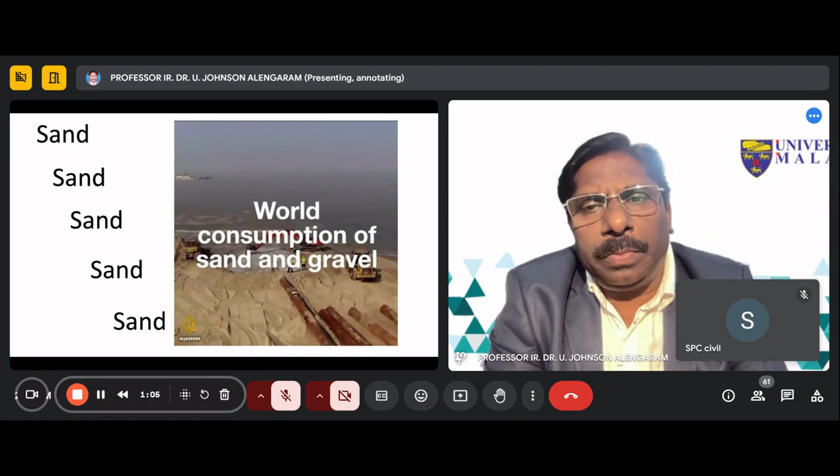Find sand in the world. It's almost become like air, the air we breathe. We don't think too much about it, but you can't live without it. Sand is not a sustainable resource. No other resource is used in such vast quantities as sand, maybe with the exception of water.

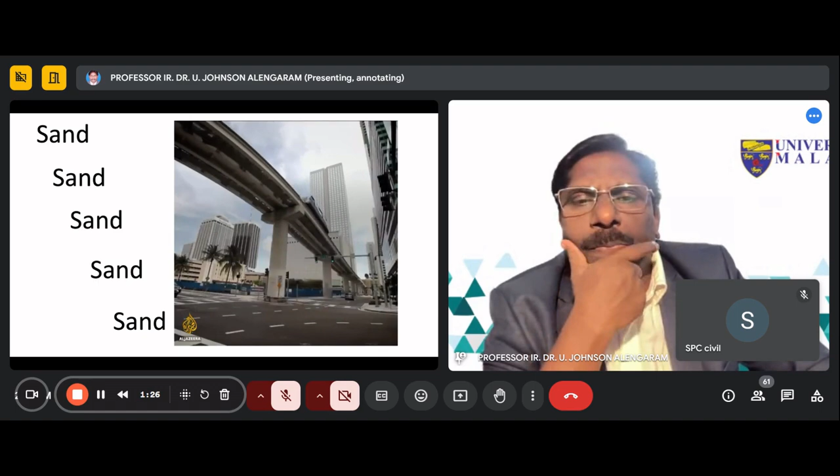The value of sand is such that it's a commercial commodity that is smuggled. I mean, it's a big business smuggling sand.

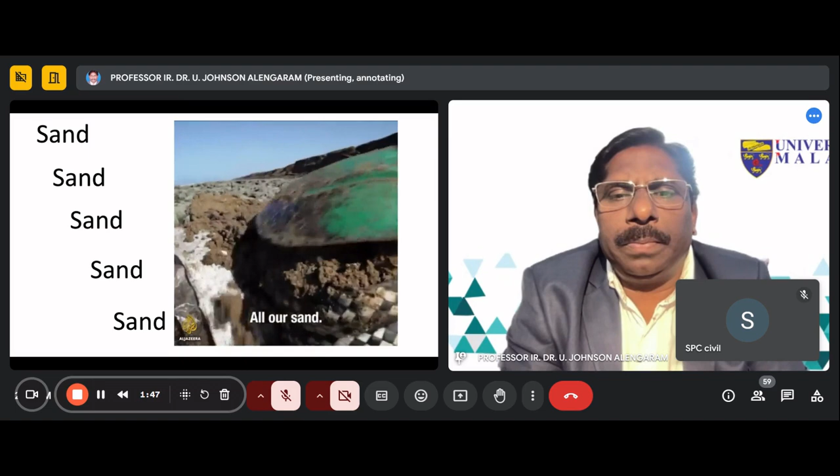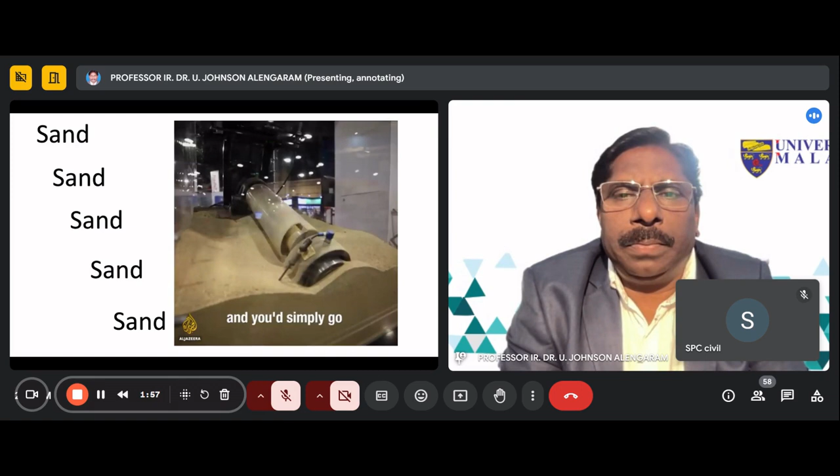It used to be that you'd have a sand and gravel deposit, and you'd simply go and dig it up out of the ground, so you'd have sand to make your roads, bridges, and buildings out of. But that type of material has all been taken away. It's gone, we've used it already.

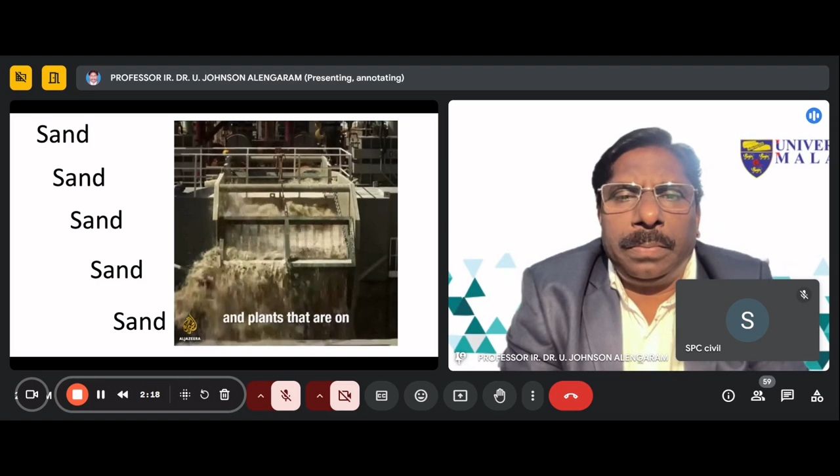As you dredge up the sand, of course the animals and plants that are on the seafloor will all be dredged up as well. Whatever living communities are there will just be eliminated.

Globally, between 75 and 90% of beaches are actually undergoing some sort of retreat, and that's only going to get worse.

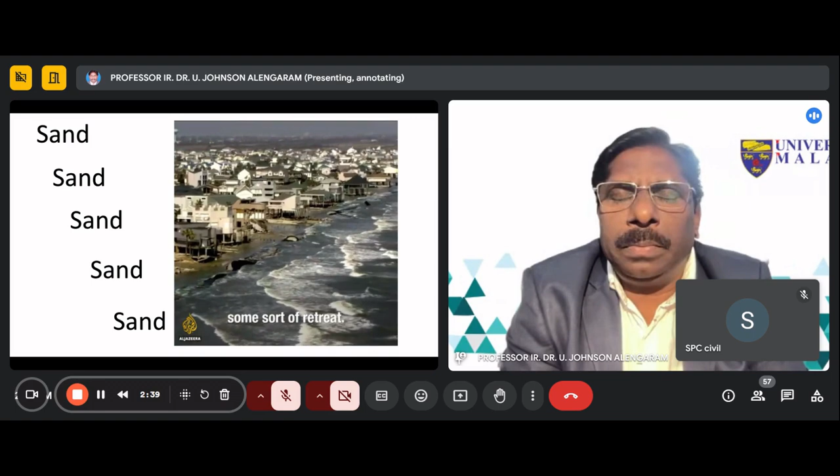This is very serious information regarding sand. I'm really concerned, as a researcher and as a parent, we should think of the next generation, and it is very serious. I hope what you see here shows that sand is not only used for cement construction in industry, but in a huge number of applications: electronics, cosmetics, even paper and tissue papers, and so many other things. Sand is a precious material, so it's not available nowadays. It's very sad.

Though some of us may end up in government agencies for policy making, we need to think of how we can utilize some of these materials. For instance, in Malaysia, even Indonesia is the number one palm oil producing country. Thailand, Colombia, Nigeria, Ecuador, Guatemala, and Papua New Guinea - all these countries are producing palm oil or palm trees.

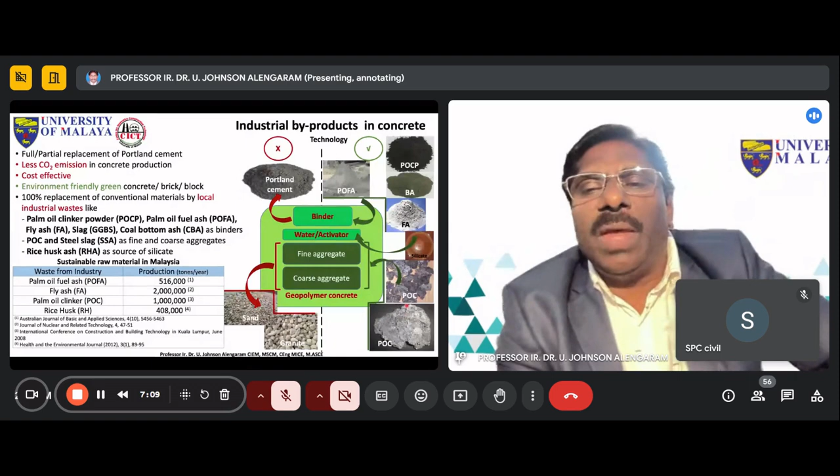We can also eliminate conventional sand by using other wastes found in Malaysia. These materials should be sustainable and at the same time resilient. Looking into GGBS, palm oil fuel ash, palm oil clinker powder, rice husk ash, coal bottom ash, and fly ash—these are some of the materials available. Some are traditional, and some have become traditional, but others are non-traditional.

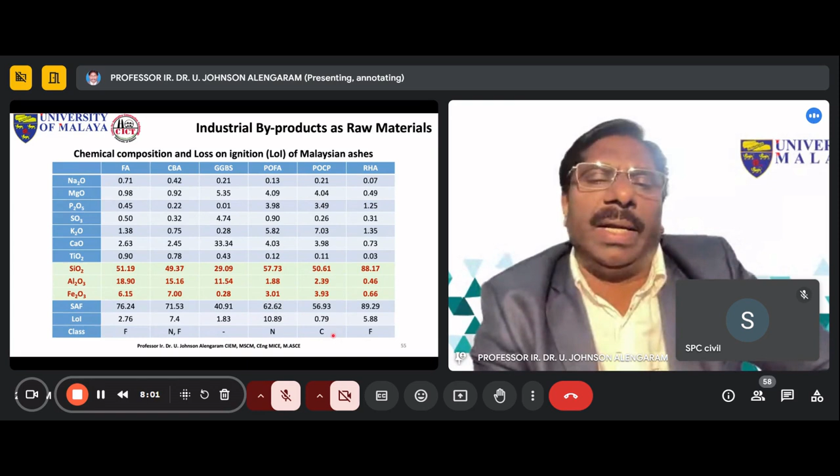There's palm oil fuel ash, palm oil clinker powder, and rice husk ash. If you look into the silica, alumina, and iron content, I'm sure this one is about 76%, falling under class F material or pozzolanic. This one is class C material. So these are the pozzolanic materials—some fall under class C, class N, or F. Based on the calcium content and silica content, they can be classified and utilized.

However, LOI—loss on ignition—is a very important criteria. We need to ensure that loss on ignition is below a certain percentage according to the codes.

Knowing that sustainable or resilient materials can be used in addition to cement, we can utilize fly ash as a cement replacement, along with GGBS. We have palm oil fuel ash, which is porous, and clinker powder, which is irregular or angular in shape, plus coal bottom ash, rice husk ash, metakaolin, and silica fume, among others that may be available.

Incinerated bottom ash is also available, used as aggregate. This comes from burning domestic and other waste, but we need to be careful because it may contain some arsenic content. So we should check for any durability issues related to arsenic or other contaminants before we utilize the material.

Some materials we utilize are oil palm shell, palm oil clinker, steel slag aggregate, and granite. If you look at steel slag aggregates, it's almost 3 times compared to oil palm shell, and this is one more than crushed granite, which we use conventionally all over the world as coarse aggregate.

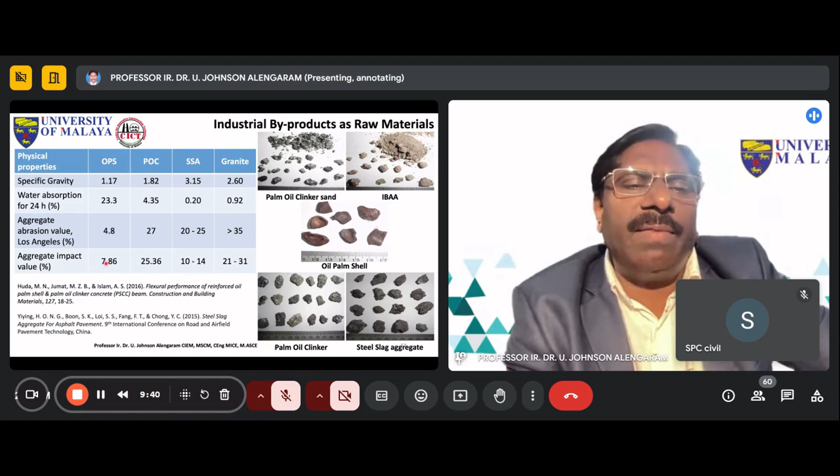If you look into the aggregate impact value, conventional crushed granite is almost 20 to 30%, whereas for oil palm shell it's only 7%, sometimes 4%. So that shows something unique.

Therefore, we have developed a concrete that, as I'll show later, can be used even in earthquake-prone regions like Indonesia and other disaster zones. Some lightweight concretes can be developed using these materials. So this one I have already explained.

The next topic is resilient modern materials for resilient structures. We wanted to develop or construct a house for STEM students or other international students—a small house using our resilient materials or modern materials for resilient concrete. So I will show you.

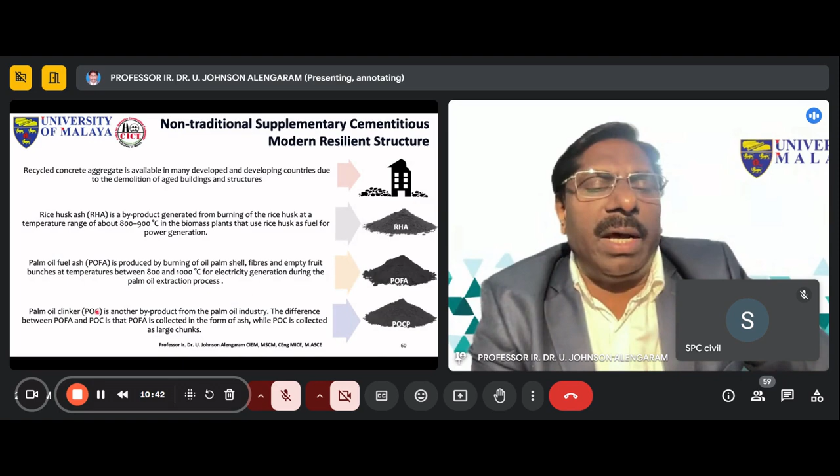One of my students embarked on this, utilizing rice husk ash, palm oil fuel ash, and palm oil clinker powder. These come from our industries—rice husk industry and palm oil industry. The two from palm oil industry, depending on the boiler, yield either palm oil fuel ash or palm oil clinker. We brought these materials to the laboratories, and my student also utilized recycled concrete aggregate.

But this is not a resilient material. If you look into recycled concrete aggregate, it is porous, consisting of past aggregates or the so-called matrix within the aggregates.

That may not be conducive to use in normal concrete. However, by utilizing supplementary cementitious materials, namely rice husk ash, palm oil fuel ash, and palm oil clinker powder, this can be made durable. That's what we assess, the durability, also using the microstructure characteristics.

So what we did was we used conventional ordinary Portland cement with a normal aggregate. At the same time, we used ordinary Portland cement with a recycled aggregate. So it's two different aggregates, and these are the three different non-traditional supplementary cementitious materials used by my student.

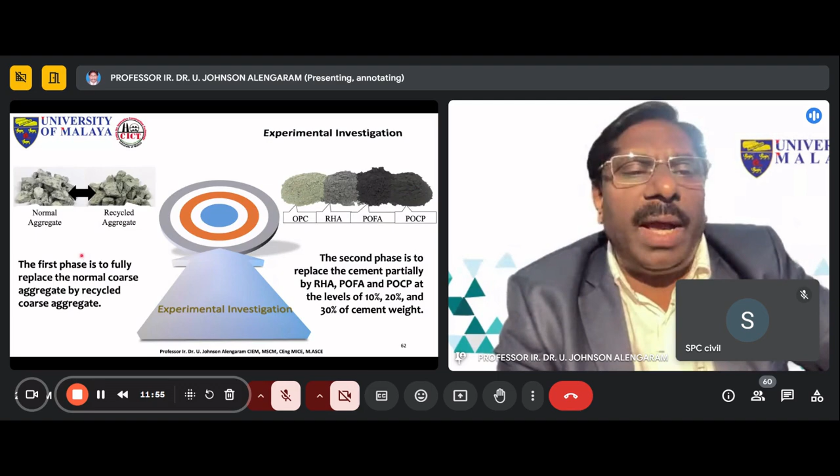What he did was utilize 10%, 20%, and 30% of rice husk ash. A similar thing was applied for the palm oil fuel ash and palm oil clinker powder. Then we utilized this coarse aggregate. Based on the investigation, we studied the sustainability performance, durability performance, and engineering properties.

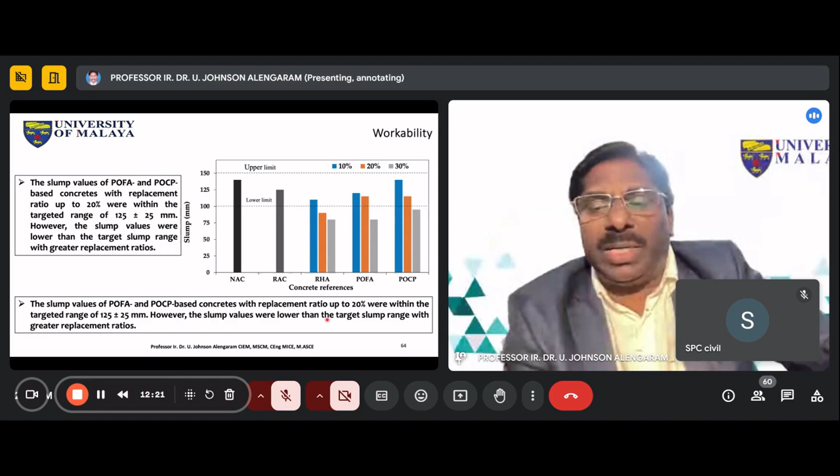What you notice here is the workability was okay, considering the 30%. When we add 30% of palm oil clinker powder or palm oil fuel ash, the workability gets reduced, because this material is porous. When you see this porous structure, it absorbs the water, thereby the workability got reduced. That's normal, that's expected because of the porosity.

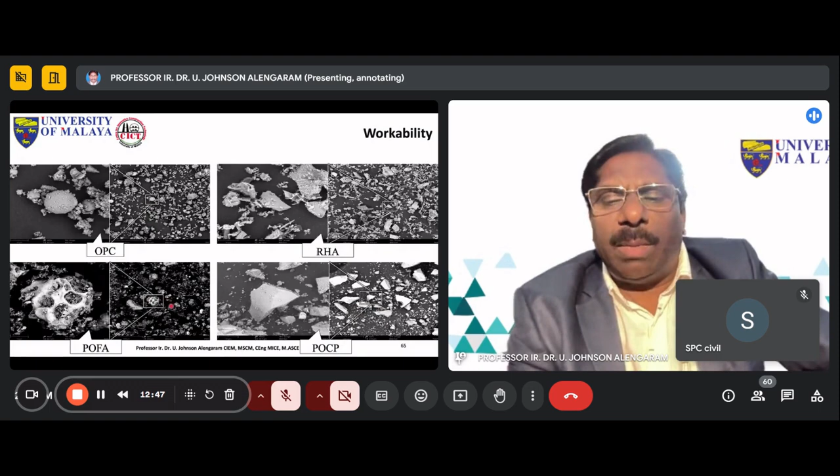So I have quoted here that palm oil fuel ash is a porous material, compared to ordinary Portland cement which is not as porous. So POCP or POFA, having a porous structure, absorb moisture, thereby the workability gets reduced. However, the relative compressive strength shows RHA has improved the compressive strength of concrete because of the silica in rice husk ash.

When we mix cement with water, it produces calcium silicate hydrate and calcium hydroxide compounds, whereas the calcium silicate hydrate is a strength-producing compound. The calcium hydroxide is just standing there without contributing towards the strength.

But when we add rice husk ash, which has about 80 to 90% silicon dioxide, that silicon dioxide can react with the calcium hydroxide, which is a passenger doing nothing towards strength contribution. Thereby, this RHA with its silica content reacts with the calcium hydroxide to produce more calcium silicate hydrate. So you get more strength in the concrete. That's what we have done.

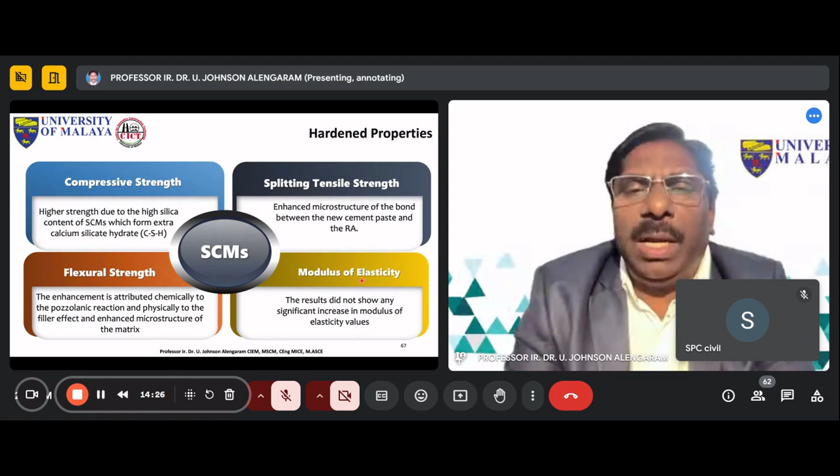We also investigated, my student also investigated, the compressive strength, flexural strength, splitting tensile strength, and all these mechanical properties. Also, because of time, I have not put all those values here.

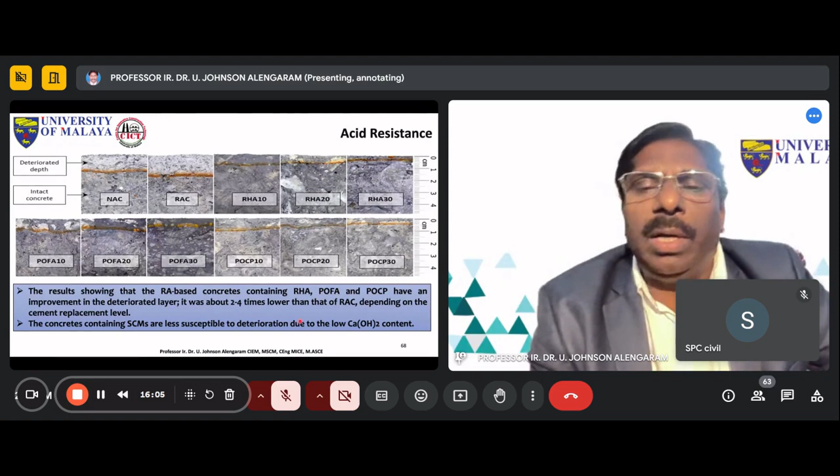So it was about 2 to 4 times better than the recycled aggregate concrete, depending on the replacement level. This is very important because, as I said, the calcium hydroxide has been consumed due to the supplementary cementitious material, that is rice husk ash, palm oil fuel ash, or palm oil clinker powder. They react with the calcium hydroxide to produce more calcium silicate hydrate, which reduces the deterioration of the surface.

Normal aggregate concrete versus recycled aggregate concrete - you can see the damage. With rice husk ash at 30% replacement compared to this, it is much better in terms of acid resistance, and also the compactness of the structure. Rice husk ash at 30% with recycled aggregate cured in acid, compared to this deterioration, we can see they are still intact. This is rice husk ash or palm oil fuel ash.

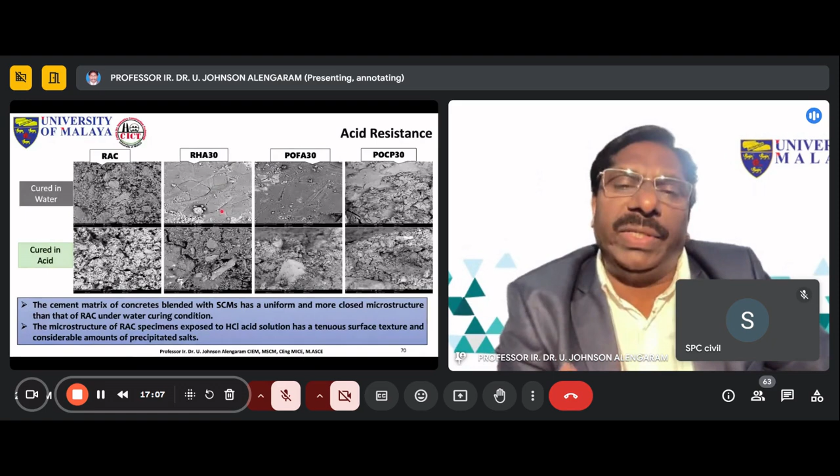The cement matrix of the concrete blended with supplementary cementitious material has a uniform and more close microstructure compared to the recycled aggregate concrete. Because when this texture is exposed to acid, it has more porosity inside. Whereas these materials, when ground, react with the calcium hydroxide to produce more calcium silicate hydrate gels, thereby making the structure of the concrete more compact.

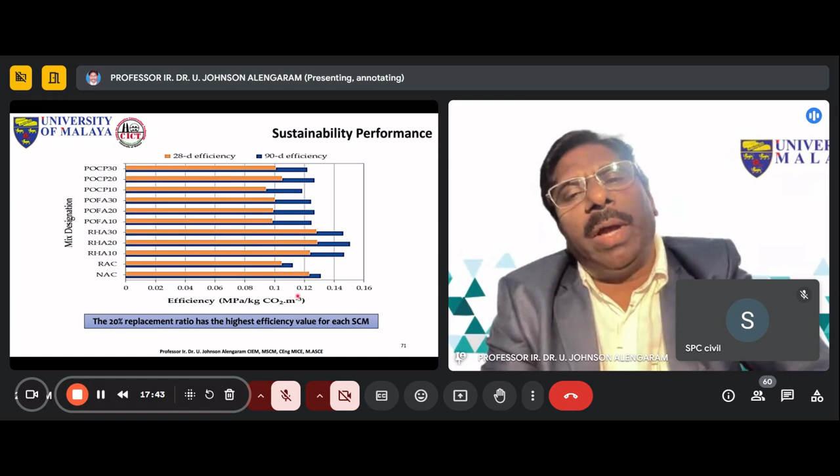For sustainability performance, we got 20% replacement ratio as the highest efficiency. This 20% rice husk ash, comparing 28-day or 90-day efficiency to normal concrete, performs better than this recycled aggregate concrete here. This efficiency was measured in terms of strength per kg of CO2 emission per cubic meter.

A summary: the reduction in water absorption was 29% lower. The chloride ion penetration was 76% lower, because we also calculated the RCPT. CO2 emissions were 29% less because we are utilizing supplementary cementitious material instead of ordinary Portland cement, thereby reducing the CO2 emission.

Also, the acid and sulfate resistance deterioration is lower, thereby the durability is good for our concrete. On the positive side, electrical resistivity is used to measure corrosion - if there is steel inside, we can measure the electrical resistivity, which directly or indirectly gives corrosion resistance. This is improving by 340%.

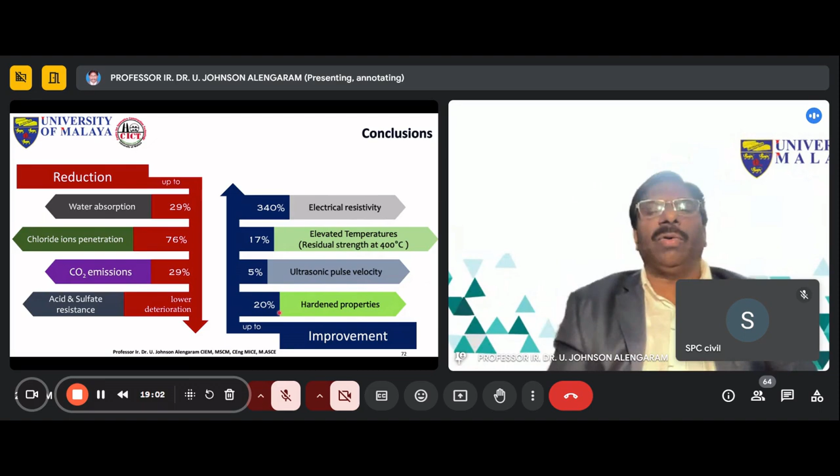We also tested residual strength at a temperature of 400 degrees Celsius, and it was 17% higher. The ultrasonic velocity, which indicates the uniformity of the concrete, is 5% higher. The hardened properties overall showed 20% improvement. This is generally what we have achieved.

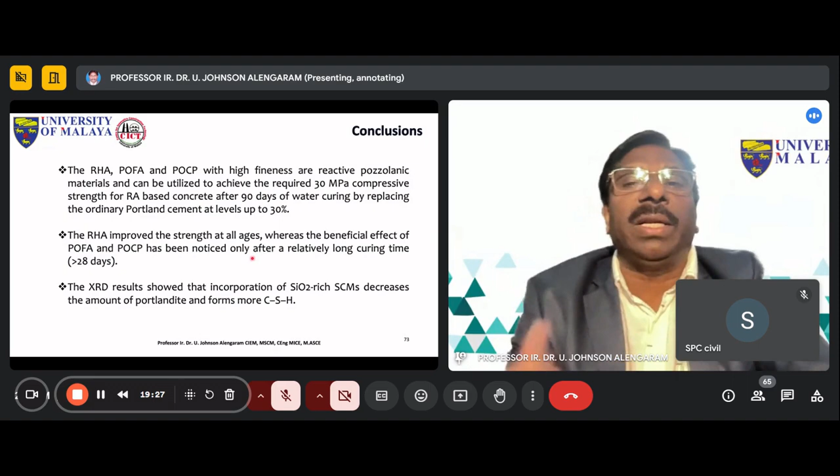From using supplementary cementitious materials - some traditional, some non-traditional - we used non-traditional ones: rice husk ash, palm oil fuel ash, and palm oil clinker powder. Up to 30% is possible, but we recommend up to 20% because of the durability aspect. 30% is not good, but 20% is good for durability.

20% and 30% is the range, but we recommend 20% considering both strength and durability performance. For durability alone, 30% works. But considering both strength and durability performance, we recommend 20% replacement of these materials. So these are some of the benefits we mentioned.

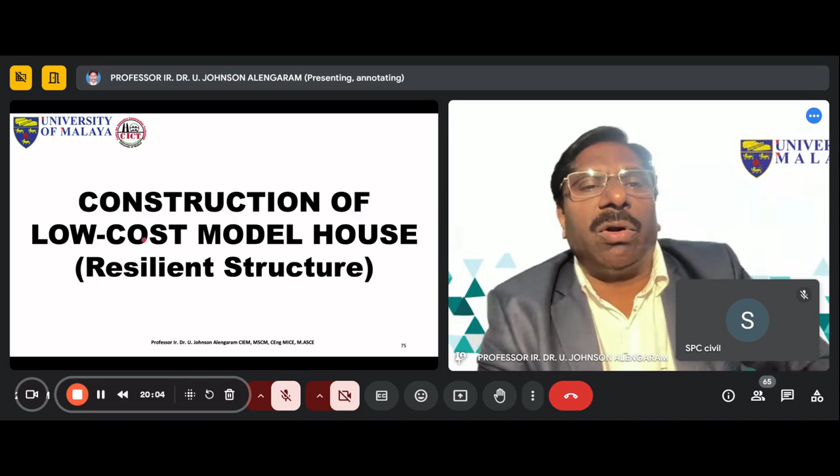I would also like to take you to the house we built for school students, STEM students and others. It's called a low cost model house. It's resilient - I call it resilient because it can withstand, and it is very good, a sustainable house. Why is this important today, developing low cost or sustainable houses?

Because we do not have virgin construction materials or natural resources. We are continuously destroying our ecological balance, thereby we dredge. Even in the video, you saw tons of materials taken from the ground. Fighting is going on for sand in different parts of the world, not only in India, because sand is getting depleted. Dredging in the sea is very dangerous, because dredging sand beneath the ocean floor causes tremendous catastrophe to the ecological balance. It has to be avoided at any cost.

8 to 10% of CO2 emissions worldwide come from the concrete industry, along with rising cost of building materials. Civil engineers all know the economy is getting weaker, building materials cost is getting higher, and millions of houses need to be built to meet the rising population. There are many youngsters today who need houses. So the civil engineer's role in the construction industry is quite important.

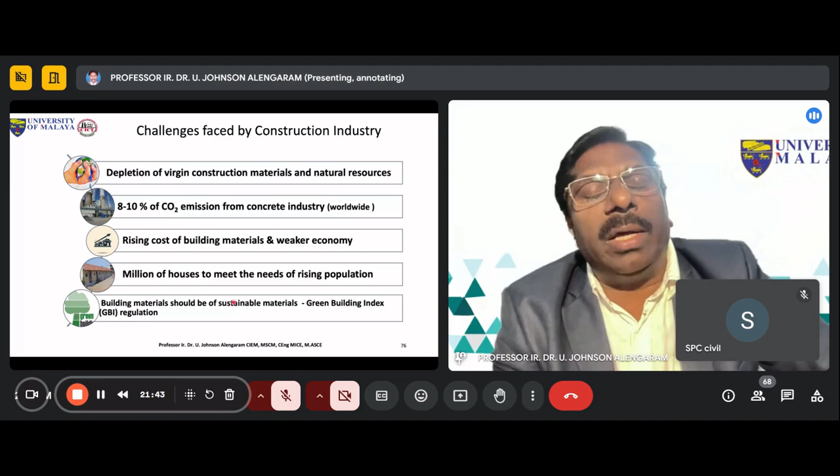Also, many governments have introduced green building index (GBI) regulations, or LEED certification. Thereby we have to use non-traditional construction material or waste material as a resource in our construction.

In Malaysia, we have quite a lot of industrial byproducts, and we have used those materials as sustainable or resilient structural materials: steel slag aggregate, palm oil clinker aggregate, and oil palm shell, which we also used for pavements. The manufactured sand, instead of conventional sand, we use for raft footing, load bearing bricks, and pavement blocks.

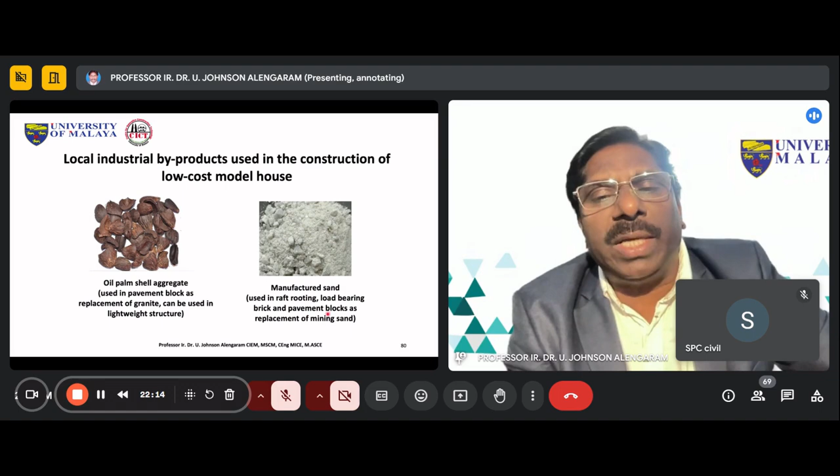These are the things, and these are the powders we utilize: palm oil clinker powder, palm oil fuel ash, fly ash, and GGBS, which we have utilized in our construction here in this house.

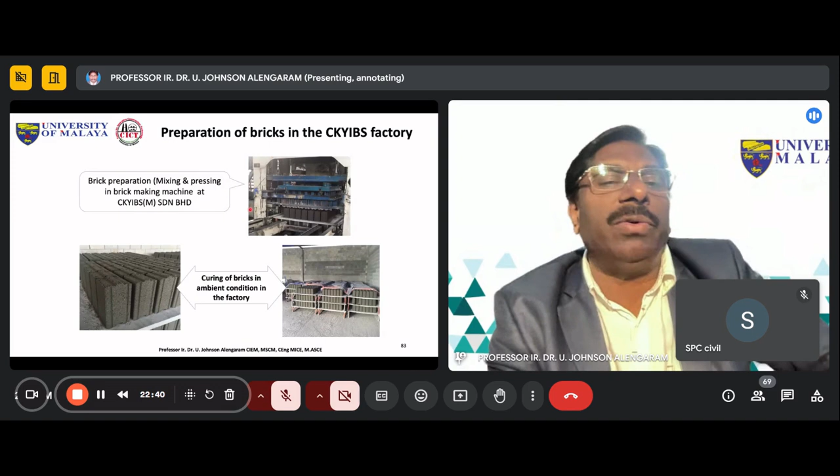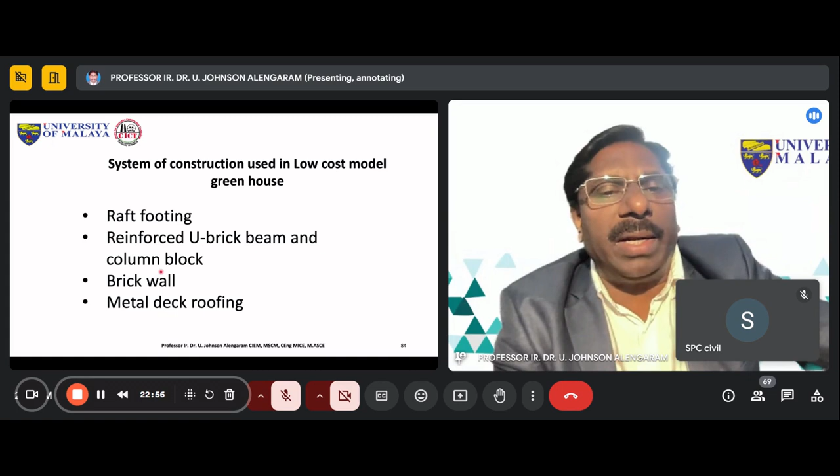We went to a factory called CKYIBS, Malaysia Sendirian Berhad, a Private Limited Company. They stopped their production, then they used our materials in the silos, and we were using a system from that company called IBS, Industrialized Building System, consisting of raft footing, reinforced U-brick beam and column block, brick wall, and metal deck roofing. This is what we utilize.

So you see that this whole place has the foundation raft footing, because this is the car park area. You see this is a road going towards the faculty road and departments, so we have to build a house here without digging the foundation.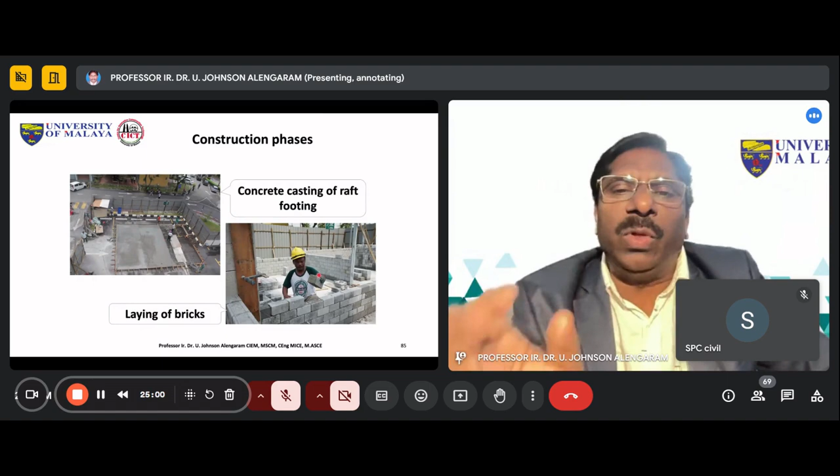This completely uses steel slag aggregate as cement replacement. We use manufactured sand instead of river or mining sand in Malaysia. These bricks or blocks we built were fabricated using our non-conventional material. Of course we use cement, but only to a certain extent.

So this is the construction of the house with 3 bedrooms, and this is a low cost house, so we cannot go for more than 900 square feet. We also built a 2 bedroom version with an attached toilet, and this is how we built the house.

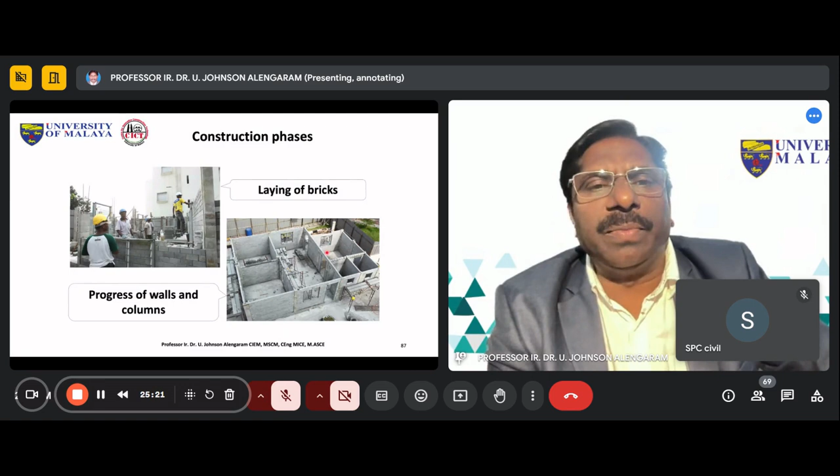This is a metal deck roof, because being a low cost house, we can't go for reinforced concrete roof, so we used a metal deck and completed the house. This is the house today. Whenever I get students from France, China, India, or other countries, or school students, I put them here. This is the green low cost house.

We built that there. For this one, there's no time, so I'm not showing the video.

Next, I'm moving towards earthquake resilient structure, because we also fabricated a slab using blast resistant concrete, which we call resilient. It can be used for earthquake or blast, so in both places this kind of concrete is quite useful.

Today we see that because of blast, damage to buildings, huge fire, or complete destruction, even earthquake—we can see this recently in Turkey, so much damage to the building, completely destroyed. So in these kinds of places we need structures that should be resilient, meaning it should withstand certain external forces.

One of the things we used was palm oil aggregate. It's biodegradable, but it can withstand earthquake or blast load—we have tested it. Look at this palm tree, the traditional palm tree grown in these tropical countries. Each of these fruits weighs almost 20 to 30 kg, and they have 1,000 to 3,000 fruitlets. These fruitlets are utilized to produce the palm oil.

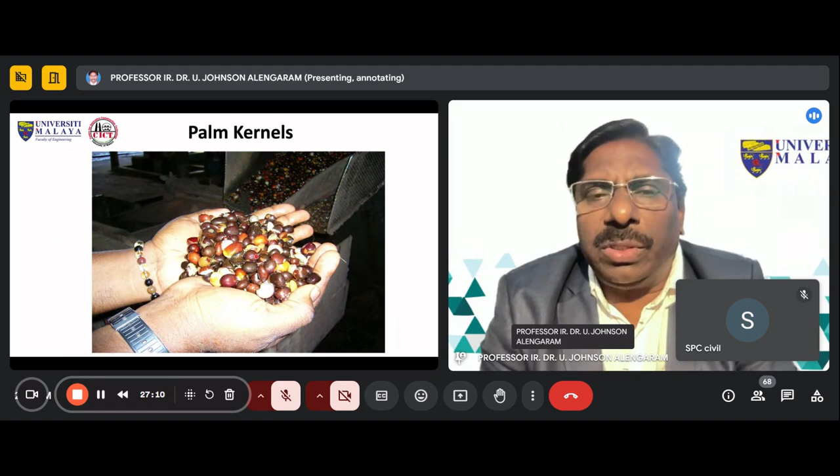And the waste that they get is this - after extracting the kernels, this is the palm oil they take from this. This picture will give you some idea. The palm oil is taken from this yellow skin or the fruit, and they need to take the kernel from here.

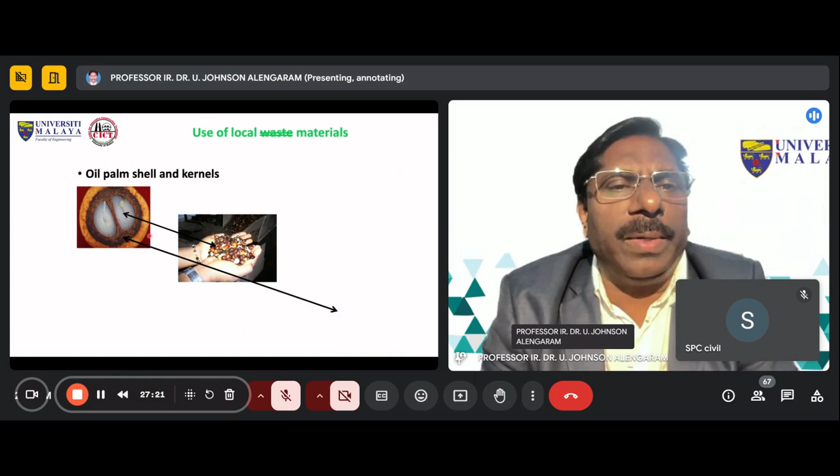This is the kernel, and the result is they have to break this shell. This is called oil palm shell or palm kernel shell. So they break this, then take the kernel. They take another oil from here, one oil, the cooking oil, or crude palm oil.

Then they purify that oil, which is coming from the yellow skin or the fruit. From this kernel, they are also taking some oil for cosmetics - they use this kernel to take another oil. But this waste is dumped, and we utilize these shells all over the palm oil mills.

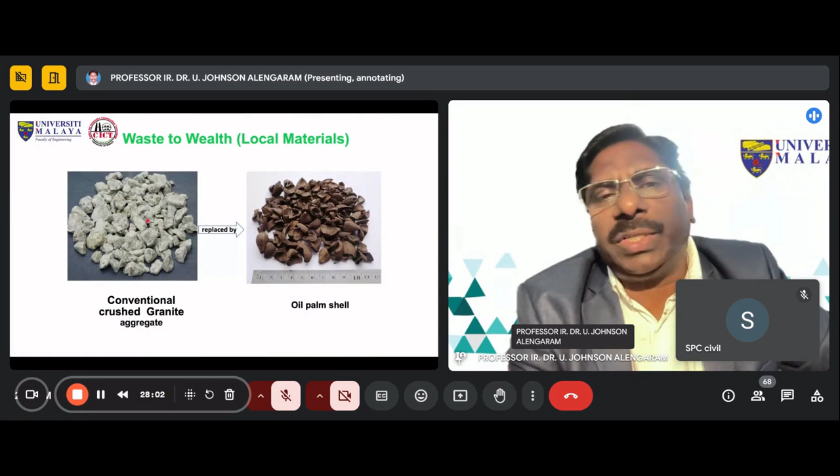We can find this, so we brought them and tested them for different properties. And you can see we replaced the conventional crushed granite with the oil palm shell.

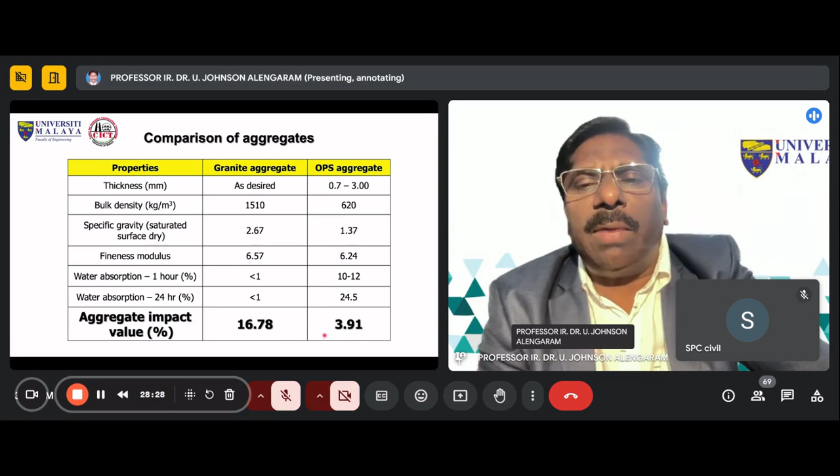The property with the more interesting feature is this aggregate impact value. Of course, the water absorption was quite high, but nevertheless, the important characteristic we utilized was the aggregate impact value. When you compare the crushed granite and the oil palm shell or palm kernel shell, it is 1/4 of this. Therefore, we can have more impact without crushing the aggregate.

So what we did was we used normal concrete and also developed oil palm shell concrete, utilizing more cement. Normally in a lightweight concrete we need to use more cement, that's expected, and we produced concrete of grade around 30.

This is normal weight concrete with a density of 2300, whereas the density of our lightweight concrete is 1800 - almost 22% reduction compared to normal weight concrete. Nevertheless, the strength was almost the same, 33 versus 36, very close.

But if you look into the modulus of elasticity, this is 26 gigapascal or kilonewton per mm square, whereas this one is only 12 gigapascal. When you have a lower modulus of elasticity, that means it will undergo more deformation.

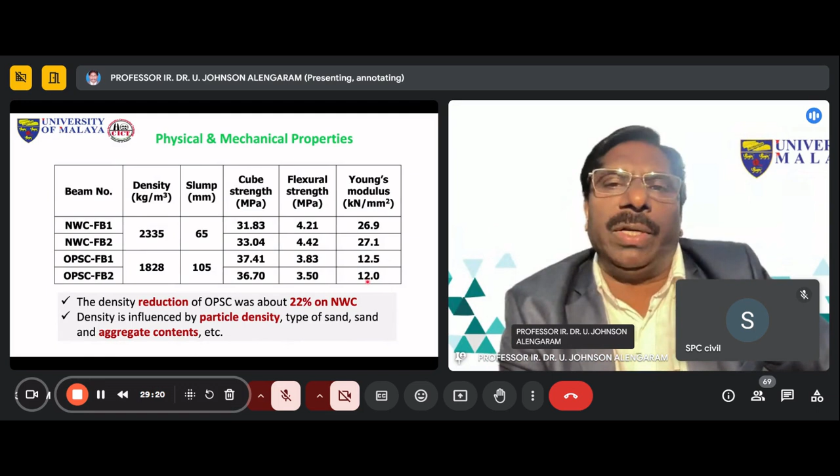For instance, the bond between this convex surface and the cementing matrix will not be that good. Therefore, we have to use silica fume, which is 100 times finer than the cement. They can stick into these tiny pores on the surface which have to be absorbed by the cement particles, but that's not possible - cement particle size averaging 40 to 60 microns cannot filter or penetrate these micropores.

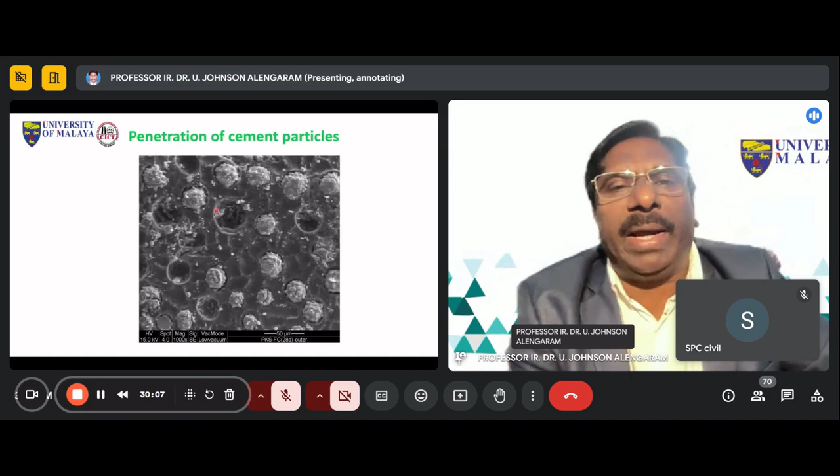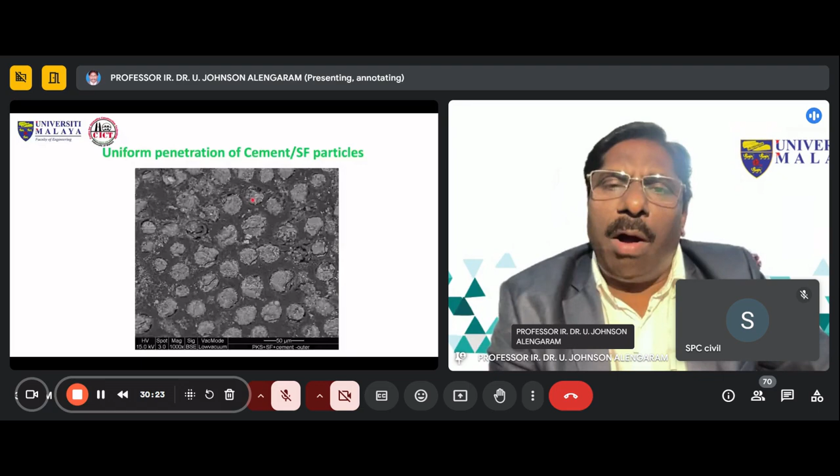So what do we do? We have to use silica fume. When we use silica fume, these 7-micron size pores are impregnated with the silica fume particles. Thereby, the bond between this convex surface and the surrounding matrix improves.

When you have a bond, the transfer of force between the matrix and the aggregate will be good, and that can lead to ductility property. So what we did was we investigated the structural behavior of the beam - lightweight concrete beam and normal weight concrete beam. We fabricated a beam of 2.1 meter size for our loading span, with a cross section of 150 by 250 mm.

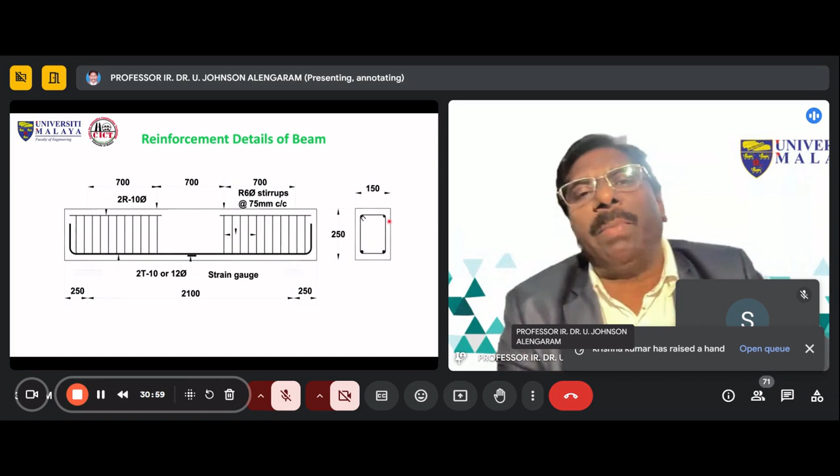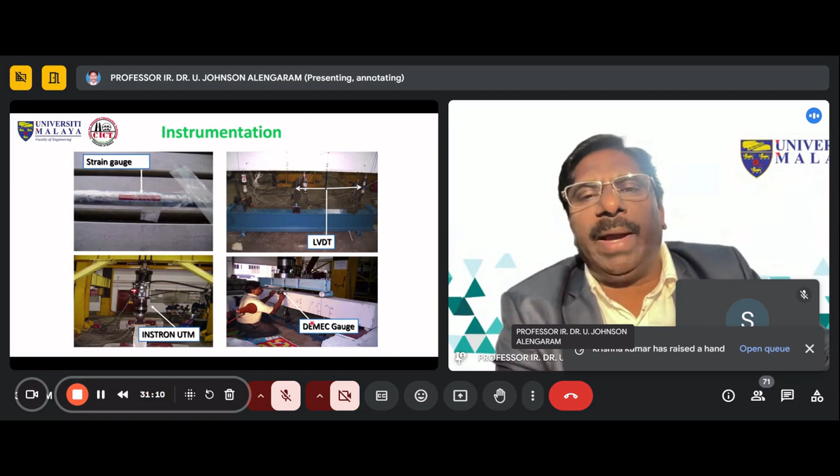This is the beam we fabricated with all the strain gauges. We tested it under the Instron testing machine. LVDT was fixed and DEMEC gauges were used to measure the neutral axis and so on. You can look at the picture.

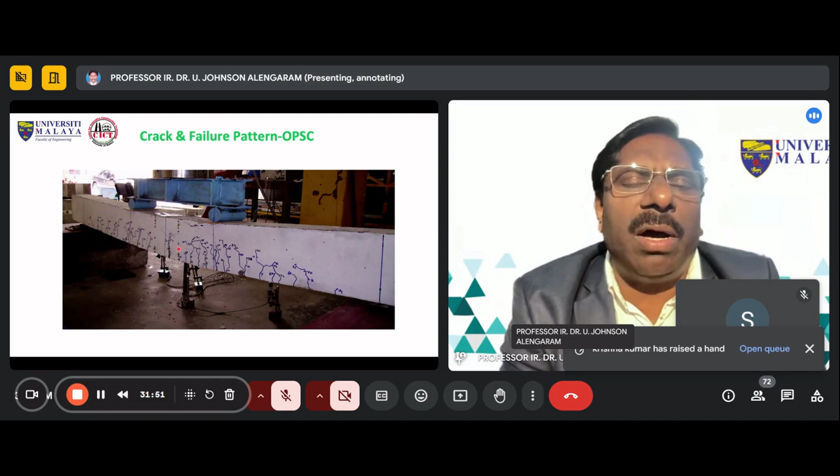Compare this with an oil palm shell lightweight concrete beam - the cracks are double compared to the other one and the cracks are zigzag. These zigzag patterns show aggregate interlock and also the bond between the aggregate and the matrix. Thereby you see multiple secondary cracks, and these cracks are not widened up, showing that the bond is quite good. There's no time to explain all of it.

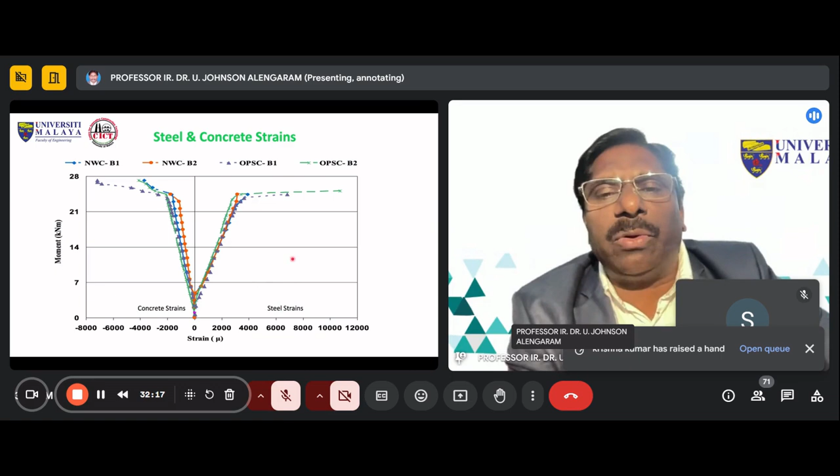So what we did was look at the strains, micro strains, in the lightweight concrete, almost 10,000 micro strains compared to 3,000. Normally we expect at 3,000 micro strain the steel will yield, but this concrete did not yield. After yielding it did not break, but continued to almost 8,000 or even 10,000 micro strain compared to the normal weight concrete beam.

Even the concrete strain was higher here, you can see. That led us, because time is short, to test the blast resistance of this concrete. So we fabricated a slab in collaboration with universities. This is the instrumentation: we fixed the accelerometer, LVDT, and pressure transducers used when we test for blast.

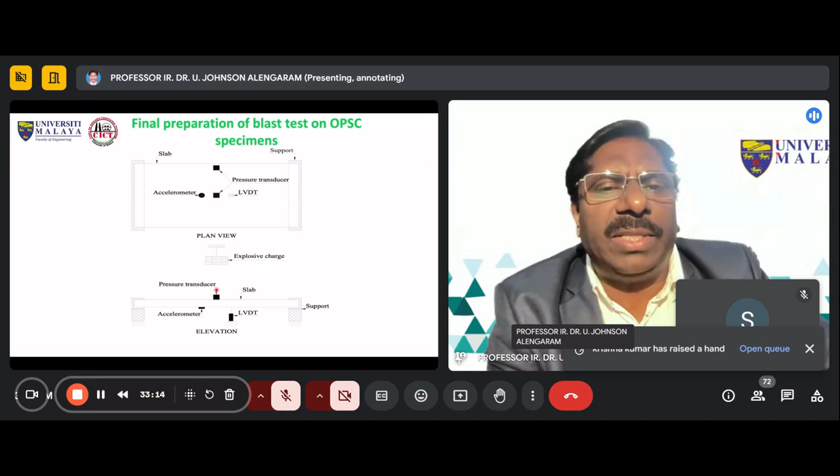Blast means an explosion - you have to have an explosive charge. This is called the standoff distance, 1.5 meters, meaning you keep the slab at a distance of 1.5 meters between the explosive charge and the slab. These instrumentations sometimes get damaged because of the explosive - when it explodes there's a possibility the pressure transducer, accelerometer, or LVDT gets damaged, so it has to be done very carefully.

Our slabs were fabricated in Kuala Lumpur, with help from the University of Adelaide in Australia, University of Melbourne in Australia, and Beijing Institute of Technology in China, which has a base in China. This is me - I went to that place, a military site in China. They allowed us to go there, and we transported the specimen from Kuala Lumpur to this place, Huludao, China.

The shipment went from Kuala Lumpur Port Klang to Tianjin Port in China, then by road around 500 kilometers. This is the site - we did it in China. This is the explosive charge.

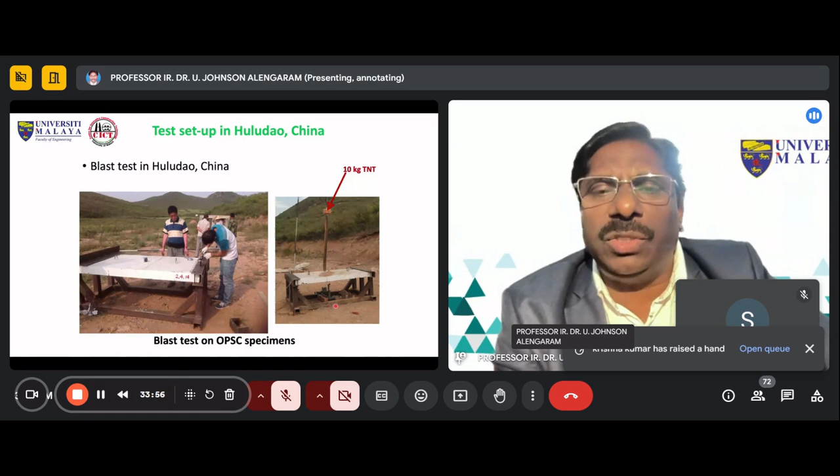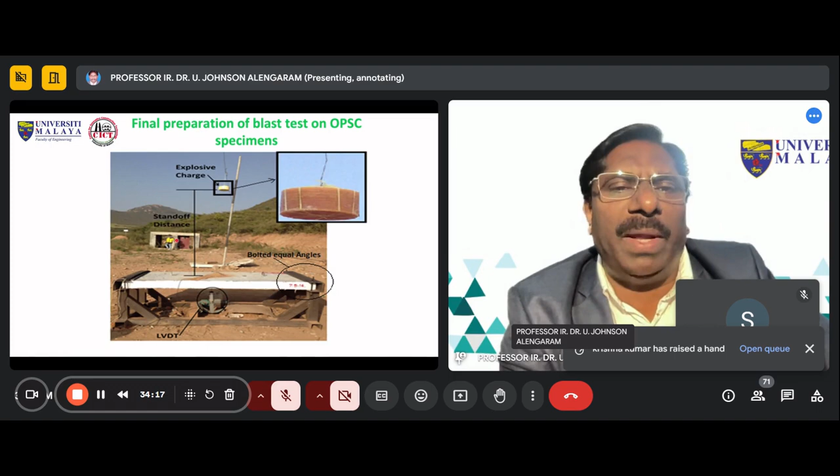You can see Professor Wang, an experienced professor in handling explosives - he is licensed to handle them. He was the one doing all the explosive charge placement and ignition. So this is what we did: 1.5 meter standoff distance, and the high-speed camera was placed here. We took the test on this.

After the blast there is fire, impact, and pressure. These things happen. Oil palm shell concrete, lightweight concrete, withstood all of this. This is after the impact, after the blast, after the pressure - you see that the normal weight concrete shattered into hundreds of shrapnels. That's why people get killed.

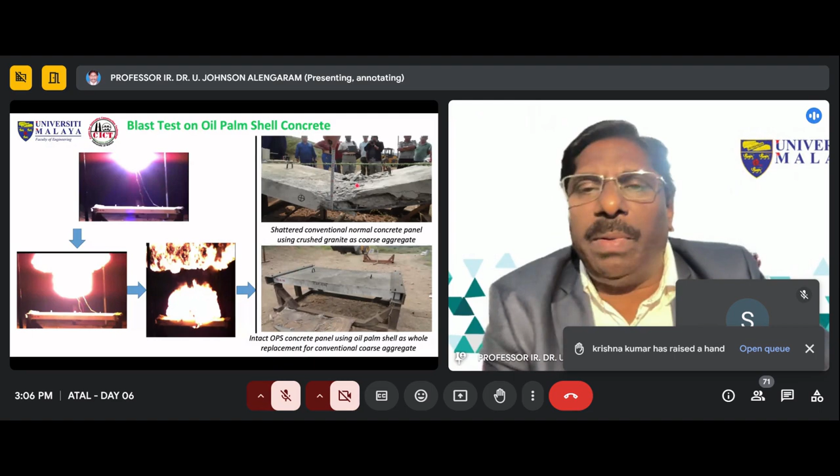I just showed you a video because there's no time. I'm going to show another slide soon.

Oil palm shells, once considered a waste material, are available plentifully in Malaysia and other Southeast Asian countries. Our research enabled us to identify the ductility characteristics of OPS, in collaboration with researchers from various universities and public bodies, to explore the blast-resistant characteristics of oil palm shell concrete. This attempt was a breakthrough, as for the first time oil palm shell, an agricultural waste, was used to replace conventional aggregate in developing lightweight concrete, christened oil palm shell concrete.

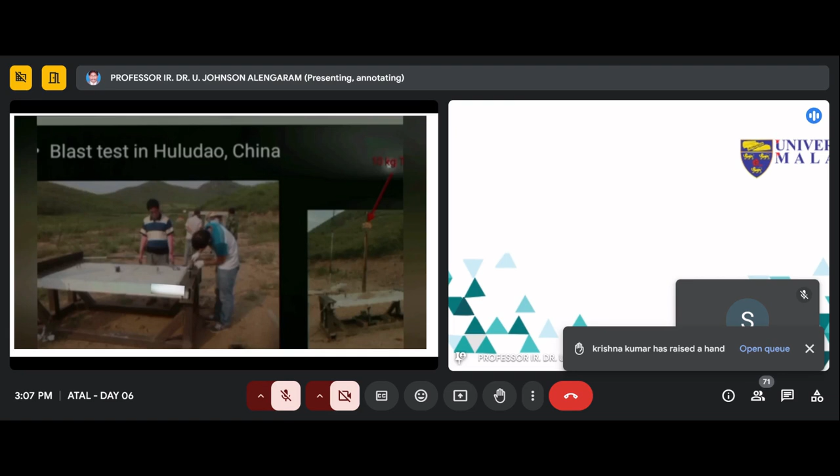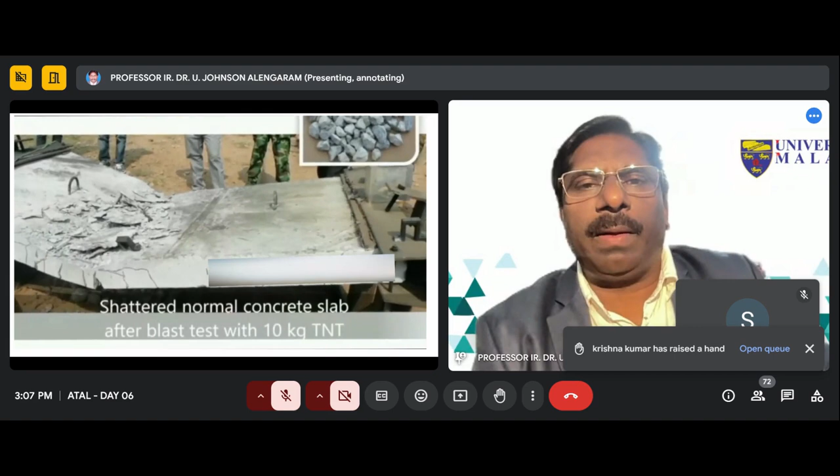OPSC was designed and fabricated in the University Malaya laboratory, then the specimens were shipped to Huludao, China for testing. Blast tests were conducted on the specimens. After the blast test, the OPSC specimens showed ductility and impact-resistant characteristics such that not even a single shrapnel was found. However, the normal concrete slabs couldn't withstand the blast test, neither the impact nor the pressure, and were completely shattered and damaged, with a large number of shrapnel found.

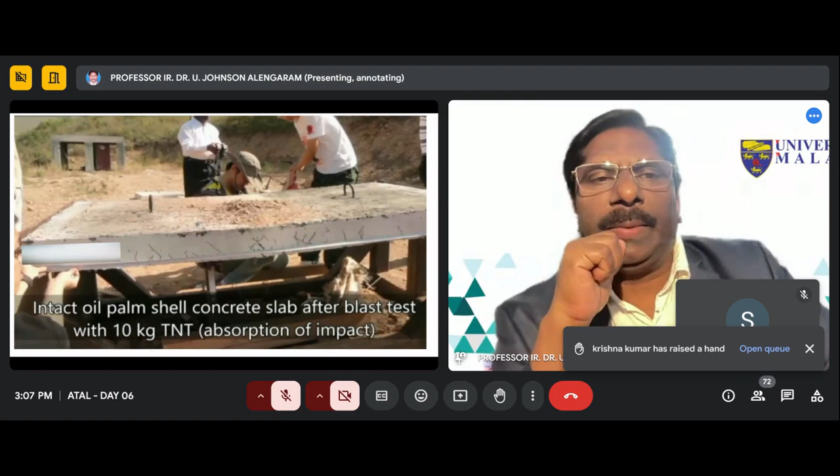Thus, the research on OPSC slabs proved that OPSC could resist blast loads up to 10 kilograms of TNT, despite multiple cracks and some deformation. The OPSC panels were able to resist the blast loads, paving the way for further research and commercial interest for future blast-resistant applications. So this is about oil palm shell concrete.

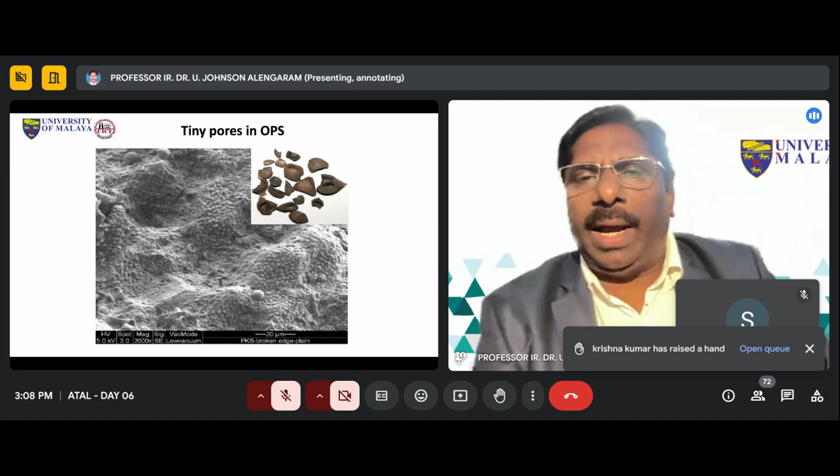I don't have time to go through all the details, but I mentioned some points before - this is a ductile material. We also built a modern structure, a building for bus drivers, using what we call cement-free or geopolymer concrete. This is also interesting - I don't have time, but I will show it within 5 minutes.

Then I'll move to the next slide. I don't know how many of you are listening, but for those who are, maybe you can take 2-3 points away from this lecture for your research or your teaching.

Resilient modern structure, that's the topic - modern material for resilient structure. So we built a geopolymer concrete house for bus drivers. We were challenged to build a house, but we didn't have finance. So we knocked on the doors of a few companies, and one French company in Paris helped us finance the project. So we built a house.

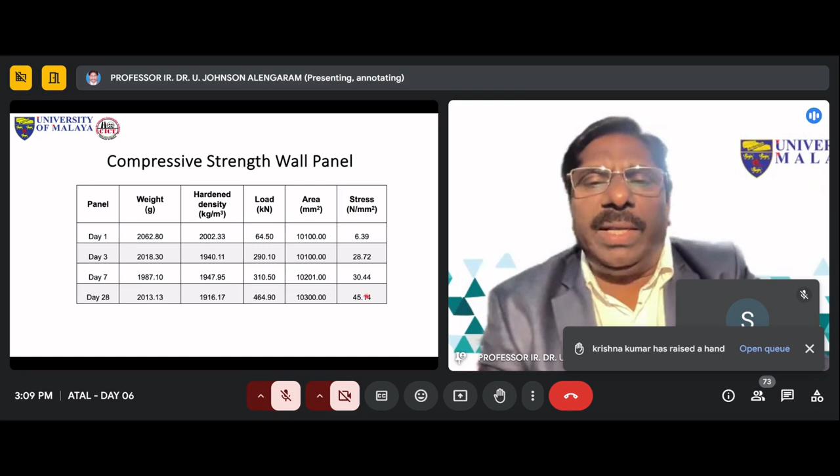We did not use any cement at all. We don't show all the materials here, but we used cement free materials, 100% eliminated cement. So then when we built the beam and column, we had a strength of 47 megapascal, and lightweight concrete below 2,000 kilogram per meter cube is called lightweight concrete. We used fly ash, palm oil fuel ash, GGBS, sodium hydroxide, sodium silicate, manufactured sand, and palm oil clinker as an aggregate.

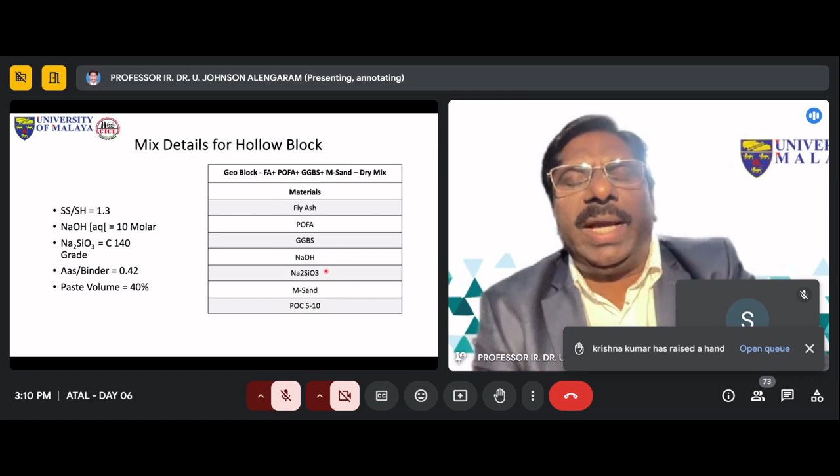You see, no conventional material, no mining sand, no river sand, no ordinary Portland cement, and so on. So this is what we used for the hollow blocks. We also developed hollow blocks - you can see some of these are hollow blocks. These hollow blocks had a strength of 12 megapascal.

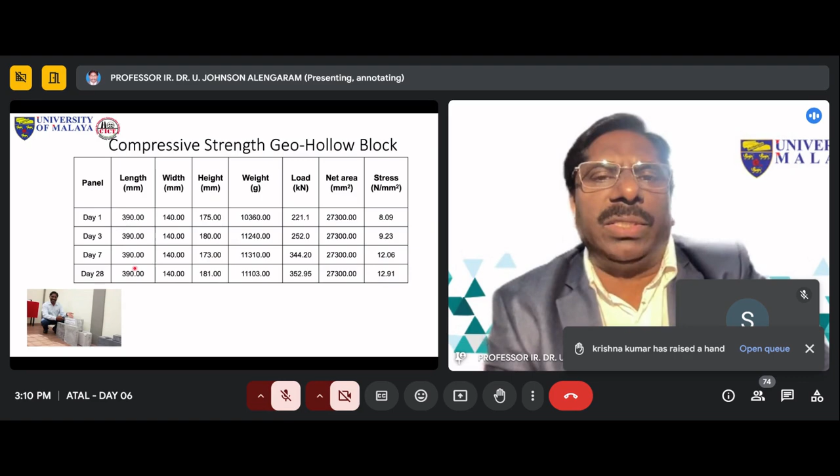That's quite extraordinary, this hollow block. A size of 390, 140, 175 height - these are the hollow block dimensions. And we were challenged to build a house for the bus drivers.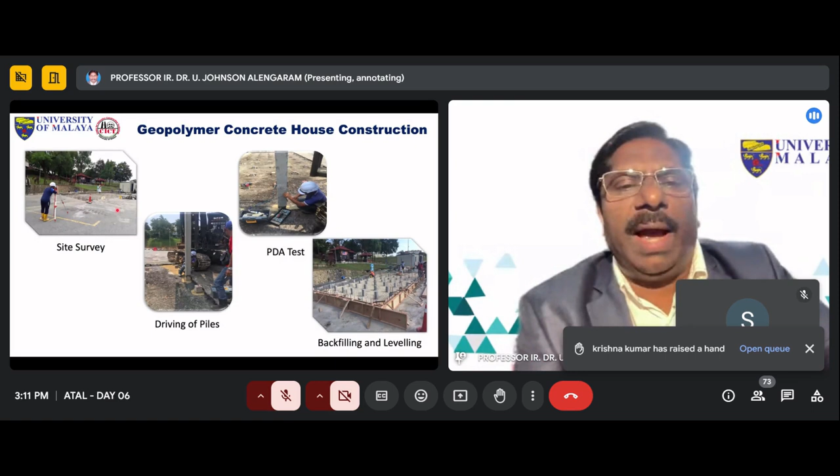So it's like a wasteland without any soil bearing capacity - SBC, say, bearing capacity is almost nil. There's just like a pile of wood at the bottom, or trees. So we had to put up some structure, a strong foundation, a resilient foundation, and we built the house.

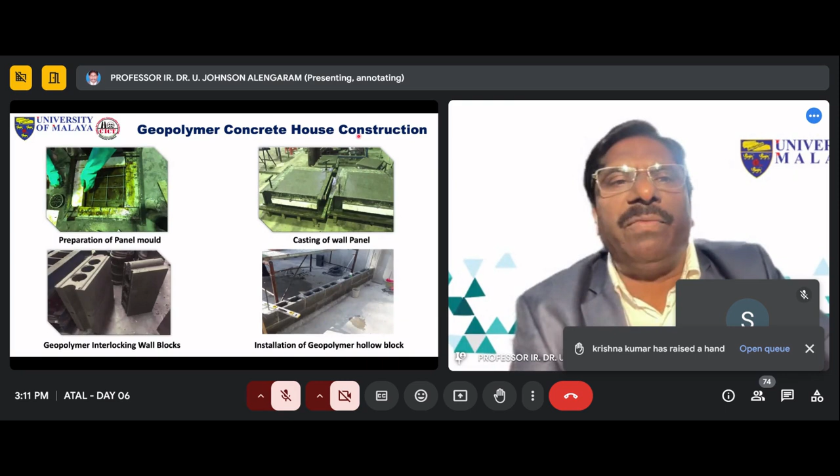All the panels, wall panels, the hollow blocks - this is by student design. This is conventional design, but cement-free material. Everything is geopolymer concrete. So we built the house using the columns and beams - even this is in-situ concrete.

We did not cure it in the curing chamber. Those days we used a curing chamber, but we did not use one here. Rather, we constructed everything with the columns and beams. And this is the house we handed over to the bus drivers now - they are happily sitting there.

So this is during the inauguration. This is me, and this is the company that provided the finance - this is the director, managing director of the company. So this is handing over the rooms, our rooms, to our own research center, because we are using one or two rooms there, and this is the bus drivers' manager receiving them.

So this is what we talk about until now. Maybe I have 20 minutes left. According to Sir Isaac Newton, my powers are ordinary - only my application brings me success. So we need to apply our basic materials to succeed. So I stop here - if you have any questions, I can answer.

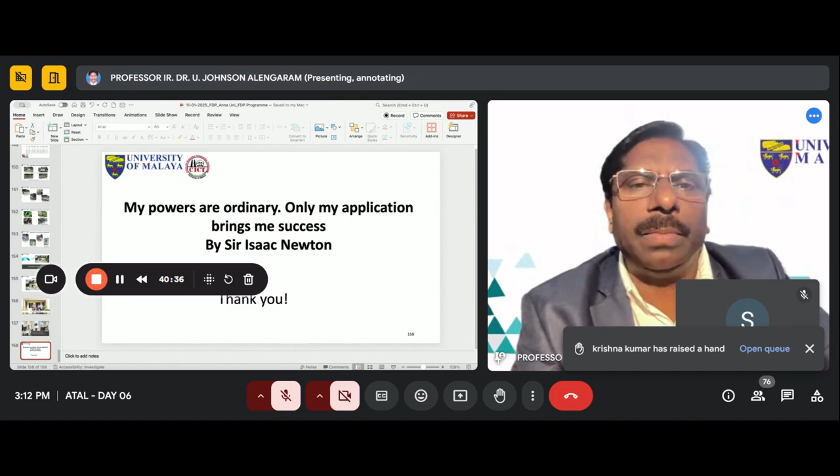I go to the next slide. If no questions, then I can go to the next one. It's called - let me open the slides.

Sir, you told you're using palm shells and all, sir - will there be any degradation? It is all organic products. Yeah, 100% biodegradable. I can assure you these materials don't stand for a long period if it's not protected.

See, what is our suggestion? When you use this, water absorption for conventional crushed granite is 2% or 1%, but this one has 20% water absorption. It is not at all durable, because when they absorb water it can transfer to the steel bar, and then corrosion can happen. So what we should do is ensure, if this is going to be used for special structures - supposing you are having explosions in the case of armed bases or military bases, they have hundreds of tons of explosive charges stored there, or gas cylinders in the case of a gas producing company, or wherever they use gas cylinders - we need protection.

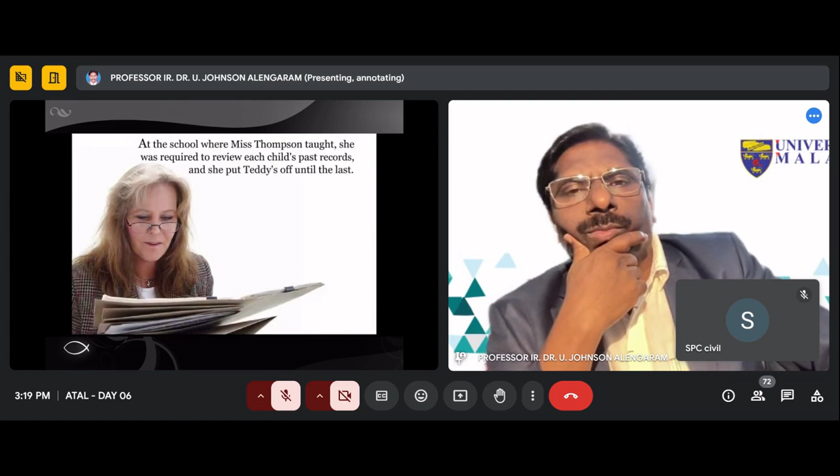At the school where Miss Thompson taught, she was required to review each child's past records, and she put Teddy's off until the last. However, when she reviewed his file, she was in for a surprise.

Teddy's first grade teacher wrote, 'Teddy is a bright child with a ready laugh. He does his work neatly and has good manners. He is such a joy to be around.'

His second grade teacher wrote, 'Teddy is an excellent student, well liked by his classmates, but he is troubled because his mother has a terminal illness, and life at home must be a struggle.'

His third grade teacher wrote, 'His mother's death has been hard on him. He tries to do his best, but his father doesn't show much interest, and his home life will soon affect him if some steps aren't taken.'

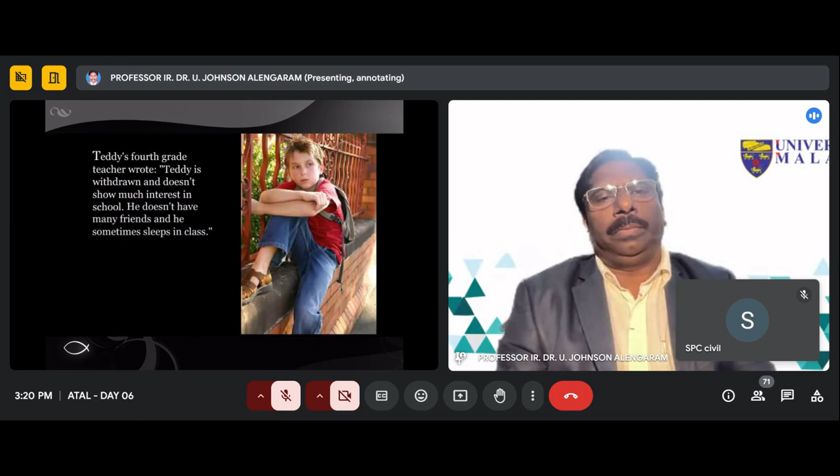Teddy's fourth grade teacher wrote, 'Teddy is withdrawn and doesn't show much interest in school. He doesn't have many friends, and he sometimes sleeps in class.'

By now, Miss Thompson realized the problem, and she was ashamed of herself.

She felt even worse when her students brought her Christmas presents wrapped in beautiful ribbons and bright paper, except for Teddy's. His present was clumsily wrapped in heavy brown paper that he got from a grocery bag. Miss Thompson took pains to open it in the middle of the other presents.

Some of the students started to laugh when she found a rhinestone bracelet with some of the stones missing in a bottle that was one quarter full of perfume. But she stifled the children's laughter and exclaimed how pretty the bracelet was, putting it on and dabbing some of the perfume on her wrist.

Teddy Stallard stayed after school that day, just long enough to say, 'Miss Thompson, today you smell just like my mom used to.'

After the children left, she cried for at least an hour. On that very day, she quit teaching reading, writing, and arithmetic. Instead, she began to teach children.

Miss Thompson paid particular attention to Teddy. As she worked with him, his mind began to come alive. The more she encouraged him, the faster he responded. By the end of the year, Teddy had become one of the smartest children in class. And despite her claim that she would love all the children the same, Teddy became one of her teacher's pets.

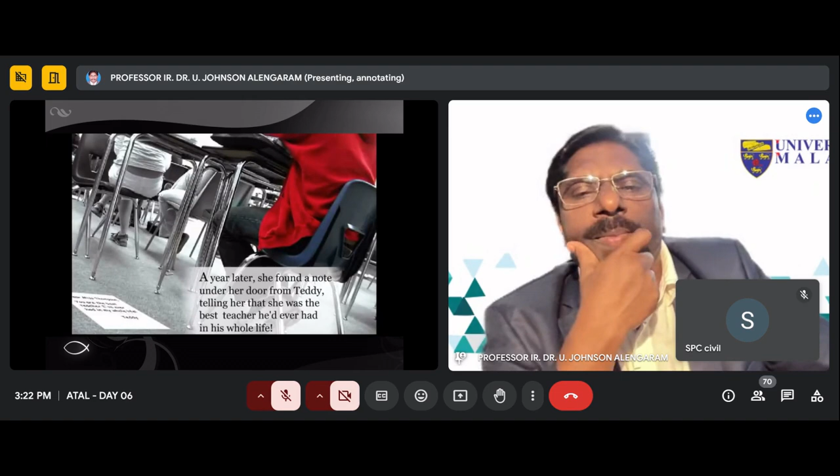Six years went by before she got another note from Teddy. He then wrote that he had finished high school third in his class, and she was still the best teacher he ever had in his whole life.

Four years after that, she got another letter saying that while things had been tough at times, he'd stayed in school, stuck with it, and would soon graduate from college with the highest honors. Again, he assured Miss Thompson that she was still the best and favorite teacher he'd ever had.

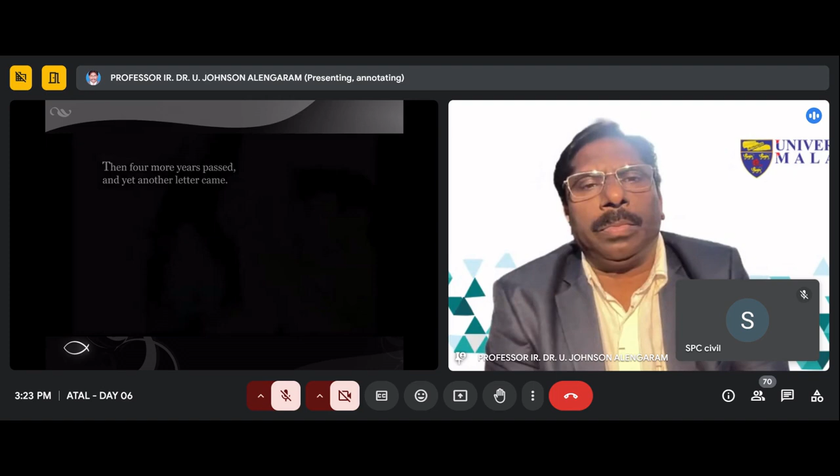Then four more years passed, and yet another letter came. After he got his bachelor's degree, he had decided to go a little further. She was still the best and favorite teacher he'd ever had.

But now his name was a little longer. The letter was signed Theodore F. Stallard, M.D.

The story does not end here. There was yet another letter that spring.

Teddy said he'd met this girl and was going to be married. He explained that his father had died a couple of years ago, and he was wondering if Miss Thompson might agree to sit at the wedding in the place usually reserved for the mother of the groom.

Of course, Miss Thompson did. And guess what? She wore that bracelet, the one with several rhinestones missing. Moreover, she made sure she was wearing the perfume that Teddy remembered his mother wearing on their last Christmas together.

They hugged each other, and Dr. Stallard whispered in Miss Thompson's ear, 'Thank you for believing in me. Thank you so much for making me feel important and showing me that I could make a difference.'

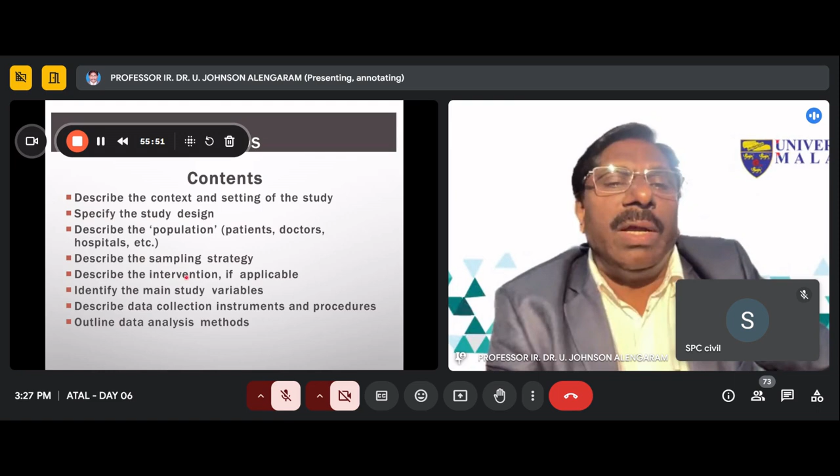There should be novelty. For example, I am an associate editor in 2 or 3 journals. When I receive submissions, I look for some kind of invention, some kind of novelty. So what is the novelty you need to mention? You have to show it in the introduction. This is very important - what is the novelty, what is new compared to the past? These are some of the points.

You need to understand the research gap - what is the gap that you fill in? What is the main finding? What is the current area, and what is lacking that needs research, and highlight the previous research. This is very important. I see many articles rejected because the researchers don't address the novelty, the research gap, and the significance of the research - why should they do this research?

One of the things I see from some countries is they don't have in-depth knowledge - they don't write in-depth discussion. They just discuss or write the results without truly discussing them. That means a lack of in-depth discussion, in-depth scientific description, in-depth analysis compared to past and present, or similar research. That's very important for writing an article.

So it requires skills - probably I'd need to give a 2 hour lecture on that. If you are interested, you can invite me, and I'm going to BITS Pilani next month, so I may have some time to share with them.

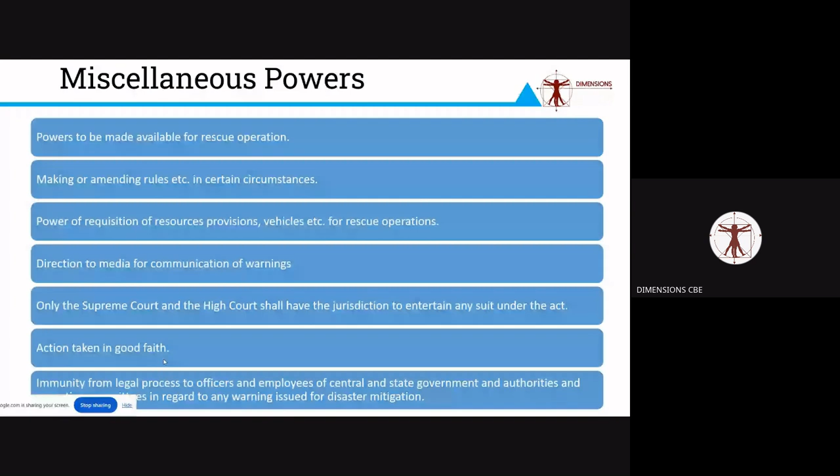So these are a list of some miscellaneous powers given to the state authorities. I was talking about the National Disaster Management institutional mechanism. See how well integrated all these committees are - none of them are separately circuited. Overall, it is like you enter anywhere, you can reach anywhere. This is how it has been designed. Of course, it is now in a kind of testing period. I hope the feedback will be well received and the system is made more robust.

This is the list, I'm going to share it with you. So these will be the nodal agencies to act in case of a disaster of that particular category. Like at the national level, at the state level also you can see a well integrated system, and this is being improved day in and day out. So I will skip these slides, except to bring to your attention that Panchayati Raj and even corporates can be part of the stakeholder committee, and they can pitch in their services, inputs, and also their demands.

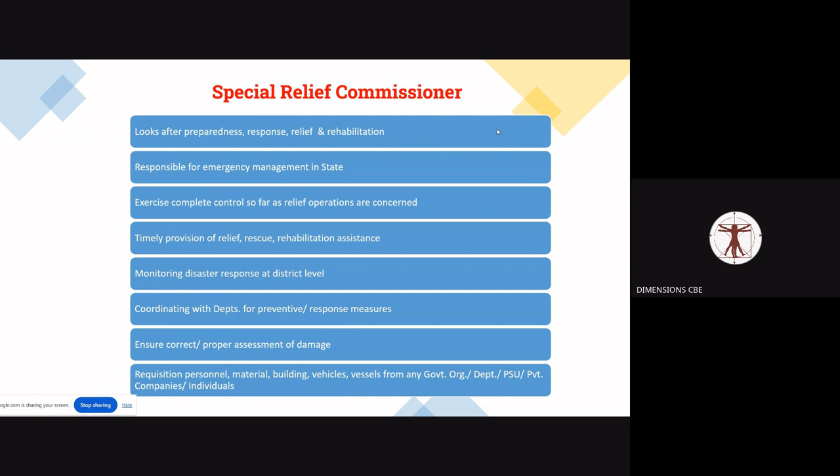There is a special relief commissioner for the entire state of Odisha. I told you earlier, he is highly empowered - equal to the chief secretary or the chief minister of the state government. So he does all the control, and it is his efficiency which is going to determine the result of the entire disaster mitigation plan. So I have listed down an elaborate role clarity, or the SOP, for each of the authorities, starting from the Special Relief Commissioner and next at the district level for the collector.

So to sum up the salient features, I think the uniqueness of OSDMA, the Odisha State Disaster Management Authority, is to prepare for the long term and not the short term. They have well grown in capacity building. Each district has got well trained officers, volunteers and NGOs who can act immediately upon a disaster. The whole community is aware - you go to any rural place, somebody knows what to do when there is a snake bite. Even very recently, I saw on TV that somebody had a snake bite - he immediately caught the snake, put it in a plastic cover, and went to the hospital just for the doctors to know what kind of snake had bitten him. So community awareness has been well established, and they have constructed ready-to-occupy shelters in case of flood and cyclone. They have done a wonderful work, and this is how they have done it, primarily due to their focus on long-term preparedness.

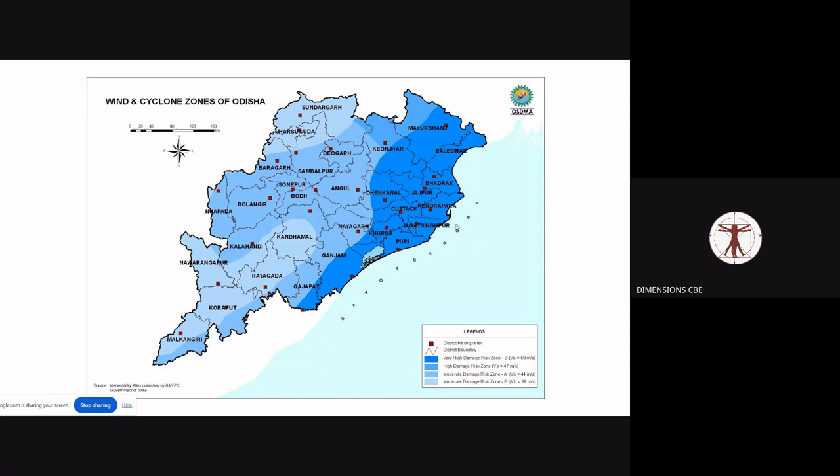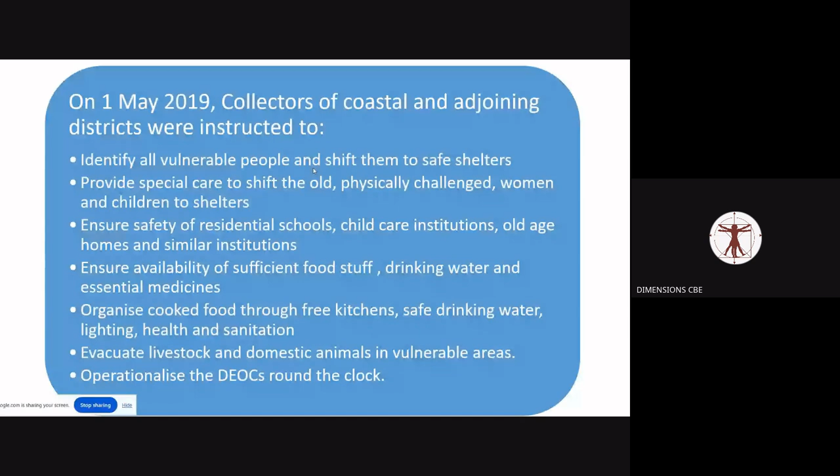So you would have read the things by now. This demonstrates how ready they were, how prepared they were, and nobody had a hesitation or confusion on whom to approach and where to approach. Now look at this figure.